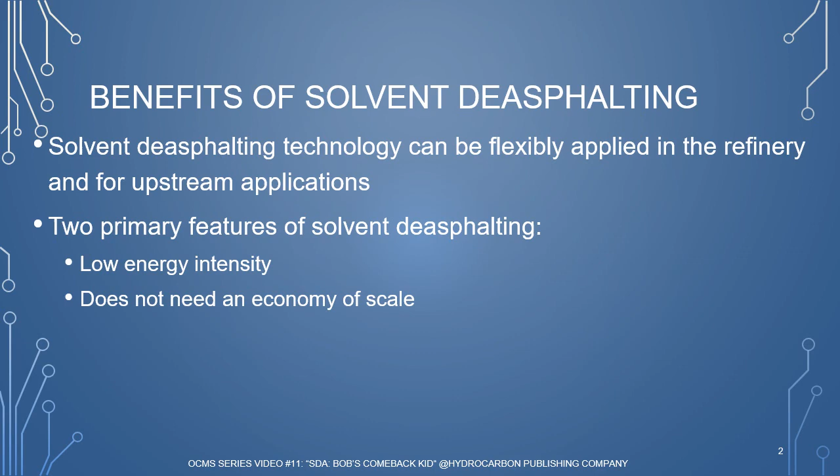As a result, solvent de-asphalting can allow refiners to improve bottoms processing capacity without negatively impacting the energy efficiency of the plant with the addition of either a small or large capacity SDA unit.

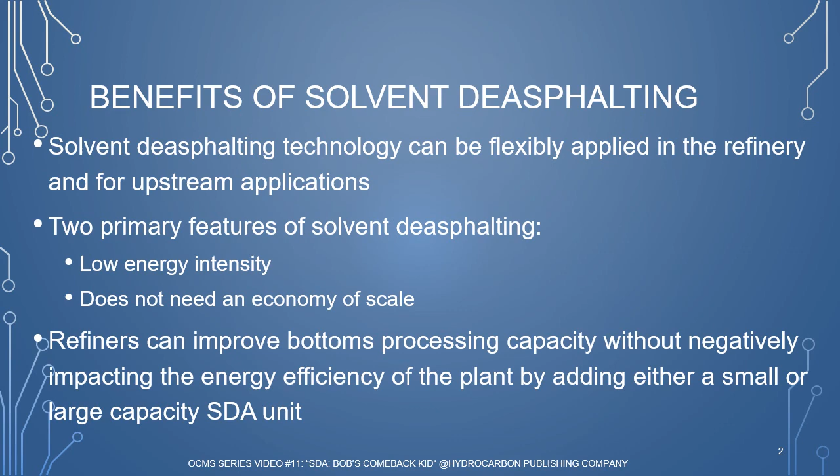In 1996, UOP and Foster Wheeler USA Corporation merged their solvent de-asphalting technologies to jointly offer the UOP-FW USA solvent de-asphalting process. Also licensed is SDA RT, whose main feature is a step-out process that boosts DAO yield by 10 to 20% while maintaining the quality of the DAO for feeding to a vacuum gas oil hydrocracker.

The company also licenses ASCOT, a process in which pitch production is eliminated by feeding SDA bottoms to the coker. Commercially, over 55 SDA units have been installed by Foster Wheeler and UOP prior to the collaboration, and several ASCOT units have been deployed.

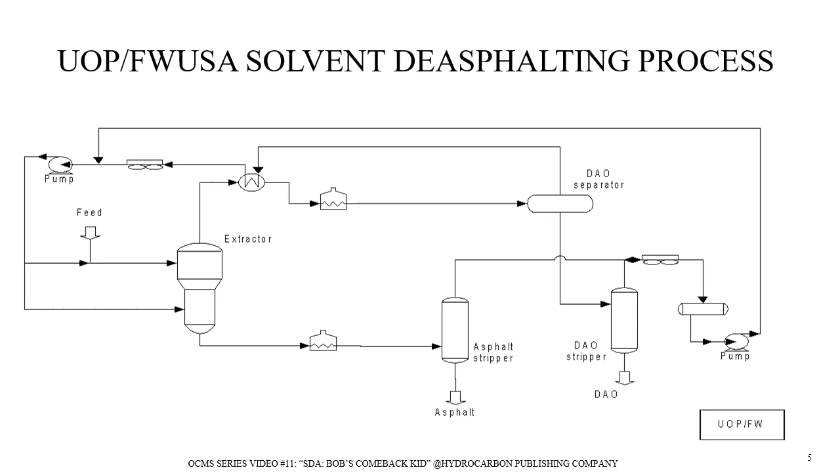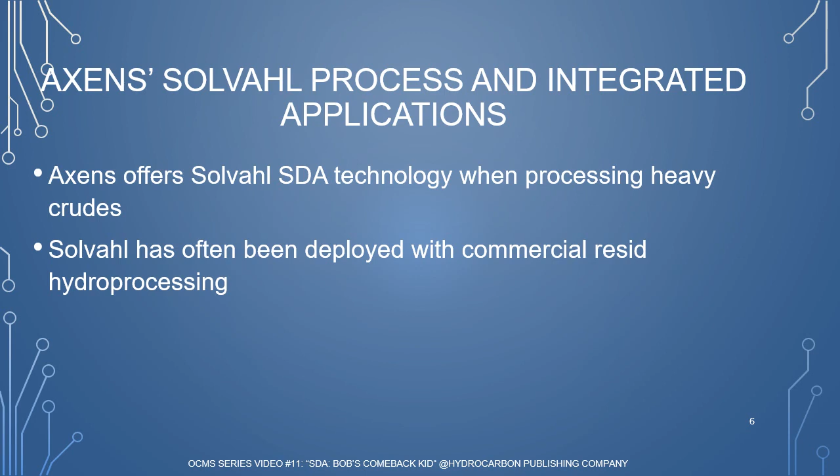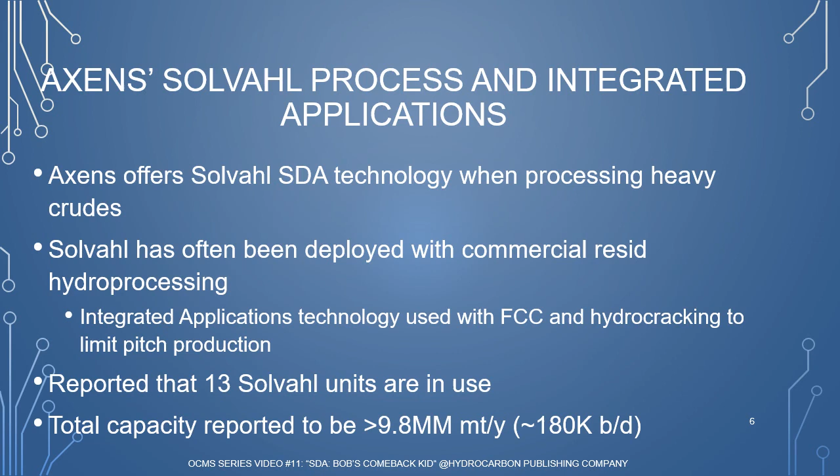Axens offers its patented Solvahl SDA technology for processing heavy crudes. Axens Solvahl has often been deployed in conjunction with its commercial resid hydroprocessing technology. Its integrated applications work alongside either commercial or conventional FCC and hydrocracking to limit pitch production. It has been reported that 13 Solvahl units are in use with total capacity reported at over 9.8 million metric tons per year, which is around 180,000 barrels per day.

The DAO product has a metals content that is compatible with downstream operations, and part of the DAO product is pumped back to the extractor and strippers in order to preheat the feed to these units. Solvent recovery is in opticritical conditions.

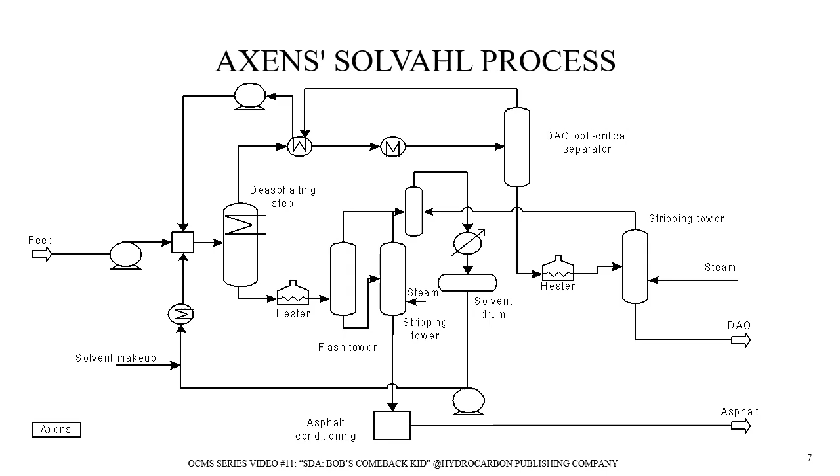Since 1995, KBR has been offering residuum oil supercritical extraction, or ROSE, for refinery processing and heavy oil upgraders to process whole crude streams. Over 55 ROSE units have been installed worldwide with a combined capacity of almost 1.3 million barrels per day. AquaForm is a patented method for storing asphaltenes, and has been successfully demonstrated using 3 different feedstocks in a 2-barrel-per-day pilot plant.

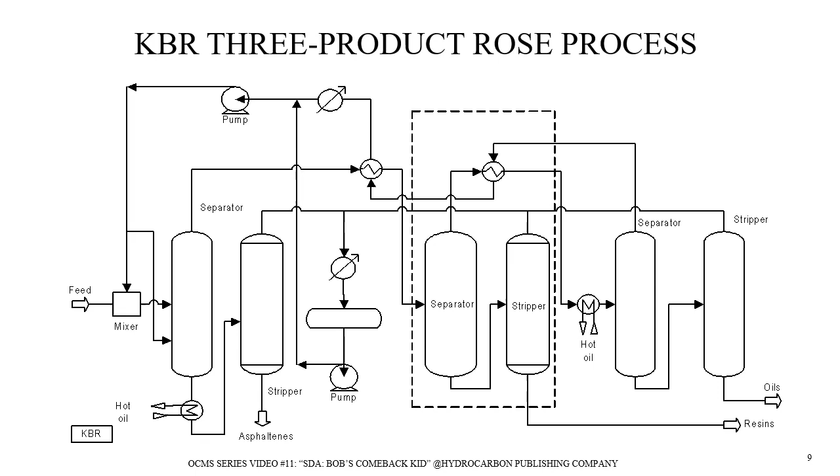KBR's ROSEFlow is similar to the ROSE process but applicable for upstream projects to upgrade heavy oil and can be integrated with a steam generator where the asphaltene can be utilized as fuel for wells and reservoir facility. ROSEFlow can also remove water and asphaltene while lowering viscosity. KBR's AquaForm is a low-cost option to handle asphaltenes by enhancing the ability to store and transport asphaltenes.

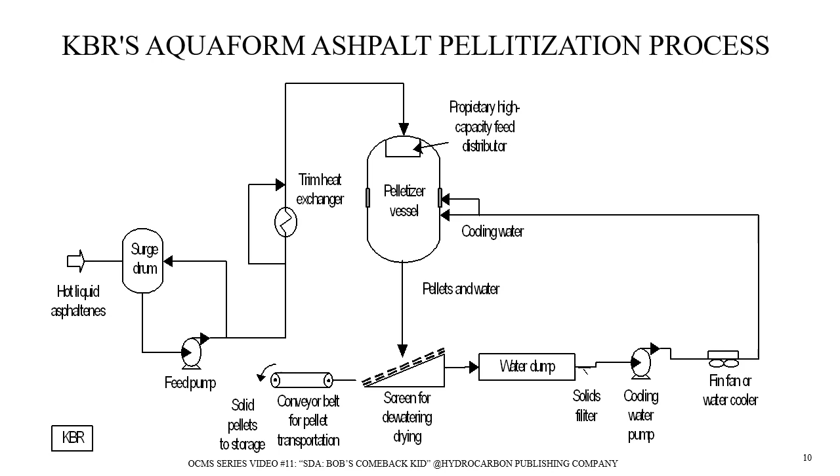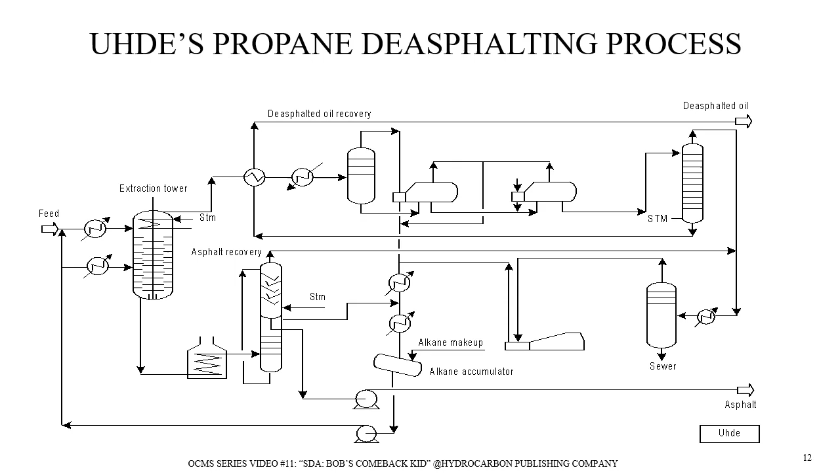Uhde's propane deasphalting is used for fuels or lubes production. The key benefit of this technology is in utility consumption for fuels production applications. A 720 metric ton per day unit was completed at a refinery in Poland. Here is a process diagram for Uhde's propane deasphalting technology.